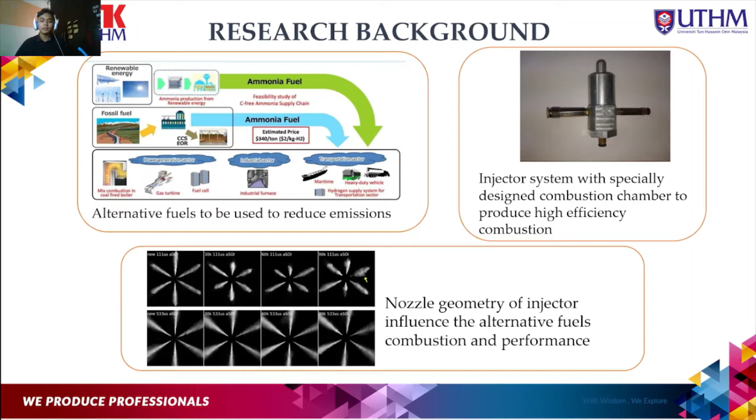And that's why nozzle geometry of injector influences the alternative fuel's combustion and performance. So the spray produced from the nozzles will affect the combustion performance as well. The problem statement. Inefficiencies in experimental method. With experimental method, it requires a lot of heavy machinery and expensive tools to do the experiment, and it consumes a lot of time.

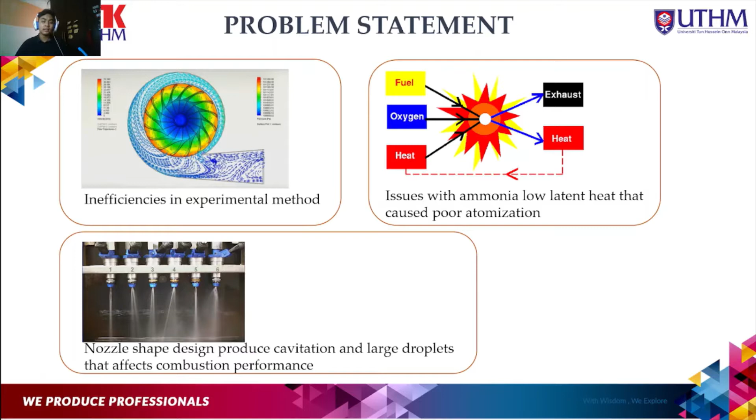The next one is issues with ammonia low latent heat that cause poor atomization. Ammonia itself has very poor properties. So we must overcome this issue so that we will have more stable combustion performance. The next one is nozzle shape design produces cavitation and large droplets that affect combustion performance. So the nozzle in this case will greatly affect the performance of the combustion.

Objective. There are three main objectives of this study. The first one is to study the simulation model for ammonia biodiesel in premix injector. The second one is to simulate the spray characteristics of the premix injector nozzle. And thirdly is to analyze the effects of nozzle shape on spray characteristics of the premix injector.

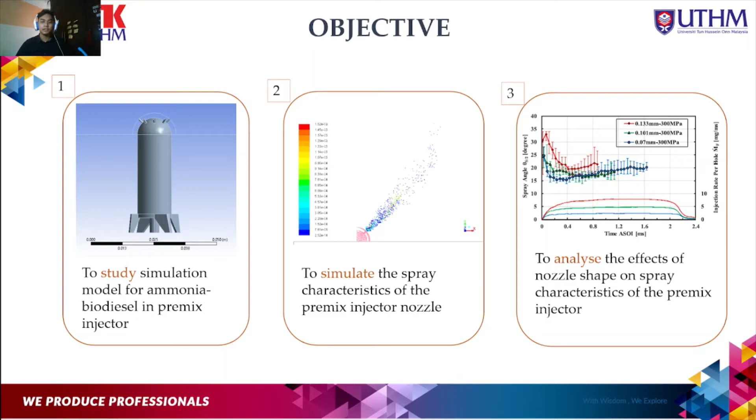Scope. Four main scopes for this study. The first one is nozzle shape, where we'll vary the nozzle shape. Second one is working liquid. The first one is the diesel and air fuel mixture, and the second one we will test with liquid ammonia. Third one is 45-degree injector angle with equivalence ratio at 1. So this one is fixed. And fourth, we will do the simulation using ANSYS Fluent and ANSYS Workbench, where we'll observe the mass flow rate, flow velocity, spray pattern, spray droplets, and cavitation produced by the nozzles.

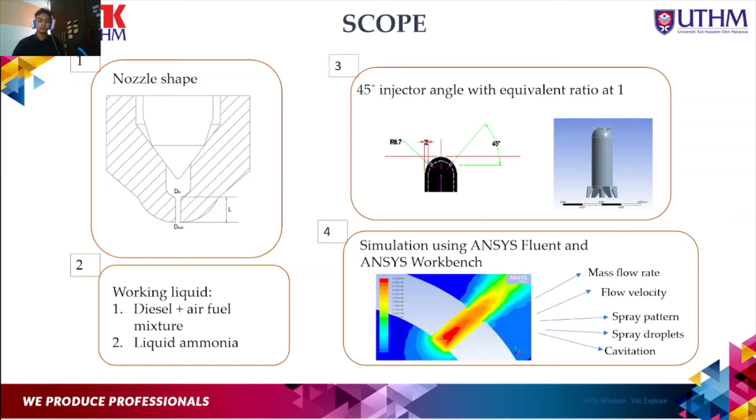Literature review. The first paper, Effects of Gaseous Ammonia Direct Injection on Performance Characteristics of Spark Ignition Engine. Basically the findings are about spark ignition engine using ammonia fuel, where increasing the level of ammonia injected into the combustion chamber results in both increased ammonia and increased NOx emission in the exhaust. The advantage is introducing ammonia into diesel fuel blend can act as alternative fuel without compromising engine power. And the disadvantage is, as ammonia has low latent heat, it is very unstable for the initial combustion.

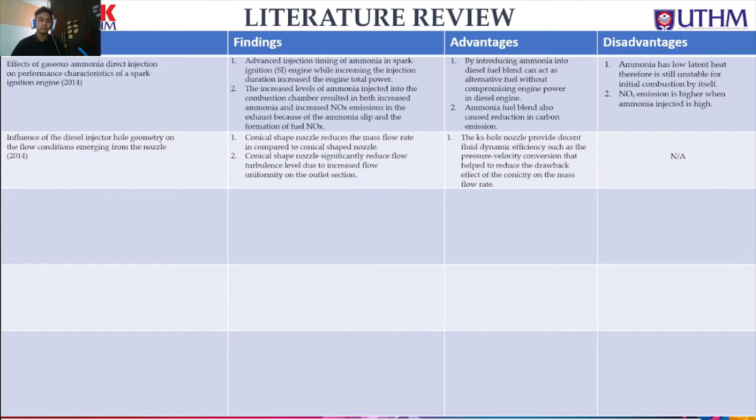The next paper is the influence of the diesel injector hole geometry on the flow conditions emerging from the nozzle. The findings are basically the conical shaped nozzle reduces the mass flow rate compared to cylindrical shaped nozzles. So it compares the shapes of nozzles. And the advantage is the KS hole nozzle provides decent fluid dynamic efficiency, such as the pressure velocity conversion, that helps to reduce the drawback effect of the conicity. So a KS hole nozzle is basically where the inlet hole is slightly bigger.

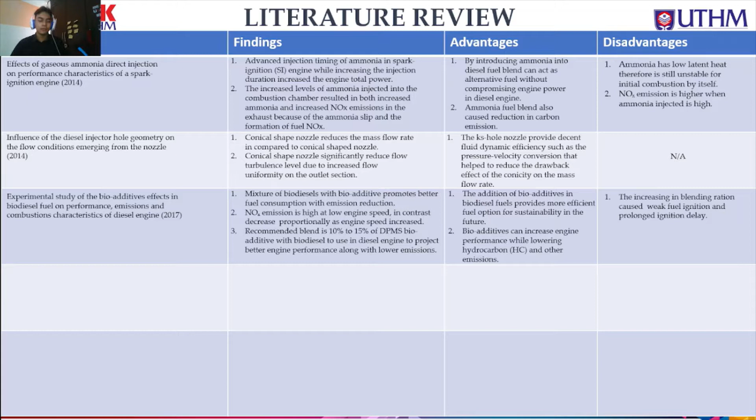Third paper is the experimental study of the bioadditive fuel effects in biodiesel fuel on performance, emission, and combustion characteristics of diesel engine. The findings are that a mixture of biodiesel with bioadditive promotes better fuel consumption, where it reduces NOx emission at high engine speed but is high at low engine speed. The advantage is the addition of bioadditive really helps to provide more efficient and more sustainable fuel. And the disadvantage is the increasing blend ratio causes weak fuel ignition and prolonged ignition delay.

The fourth paper is experimental study on the effect of the injector nozzle K factor on the spray characteristics in a constant volume chamber: near nozzle spray initiation, the macroscopic, and the droplet statistics. The findings are different K factor nozzles have different impact on spray tip penetration. The greater the K factor, the higher the spray tip penetration. The advantage is the increase of nozzle K factor increases the number of small droplets, which can lead to better combustion performance. Disadvantage is a lack of study evidence, where it states that nozzle K factor weakly affects the atomization characteristics. It doesn't state why. It doesn't have strong evidence of it.

And the last one is effects of nozzle shape on the flow characteristics of premix injector using computational fluid dynamics (CFD). The findings are formation of cavitation is significantly reduced when conicity of nozzle increases from K factor 0 to K factor 2. The advantage is there's a clear advantage of high K factor nozzles, which helps in flow characteristics.

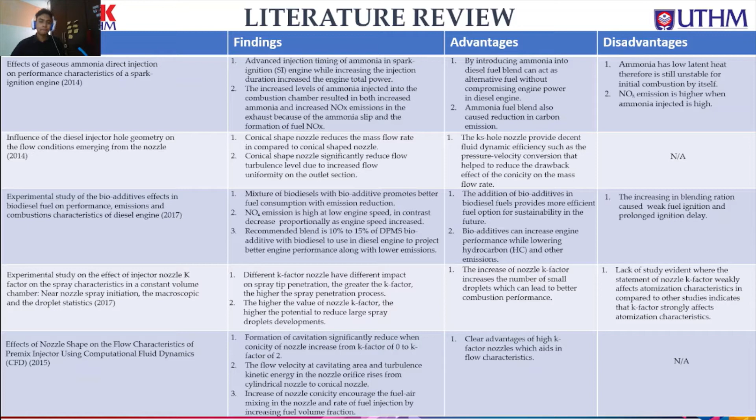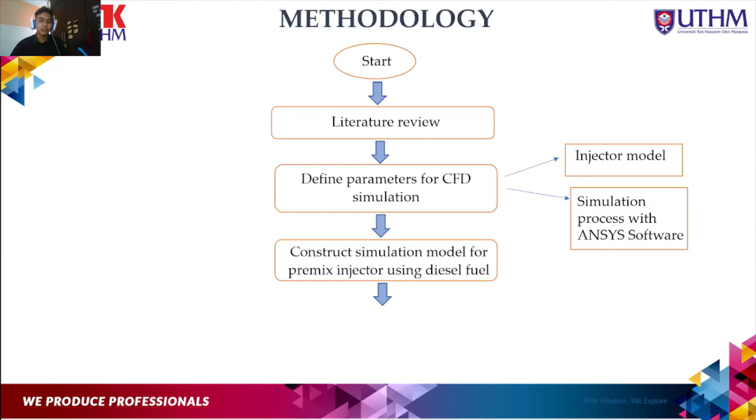Next is methodology. From the start, we will begin with literature review, and we will define the parameters for CFD simulation, where we identify the injector model and define the parameters in ANSYS software. Next, we will construct the simulation model for premix injector using diesel fuel, where the model is from the injector model, and we will set the boundary condition of the simulation. From the boundary condition, we will do a validation using diesel fuel on premix injector to set as baseline to compare with other fuels and the varied nozzles.

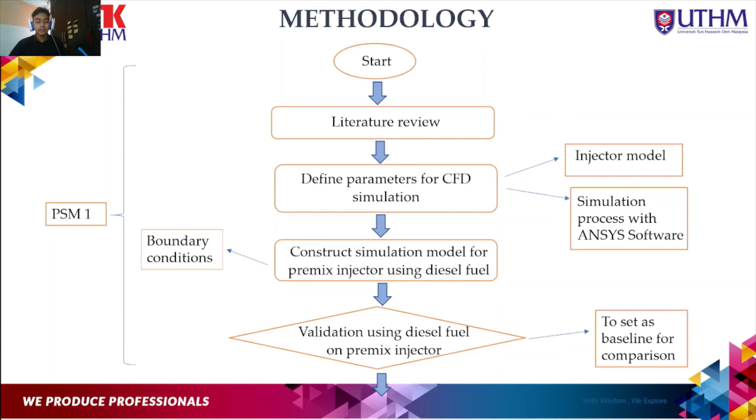So all these are done in PSM1. So for note, the validation is only 50% done, as I have only done the flow characteristic and not yet observed the spray pattern and the meshing of the grid independence test.

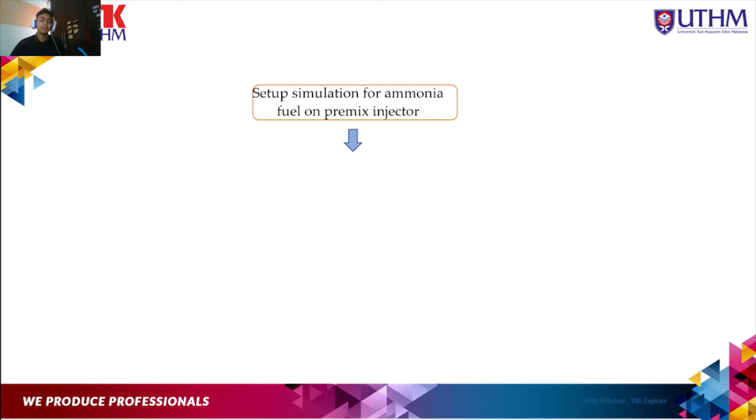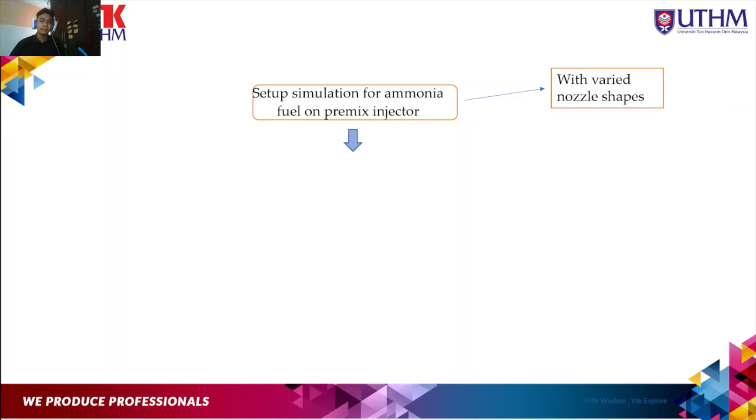So next is to set up the simulation for ammonia fuel on the premix injector after the validation is done. And we will proceed with varied nozzle shapes, which we will explain later. And next, after the setup is complete, we will simulate it using ammonia fuel. And next is to analyze the data, where we will analyze whether the nozzle shape will affect the spray characteristic and the performance of the fuel until the end. And this is in PSM2.

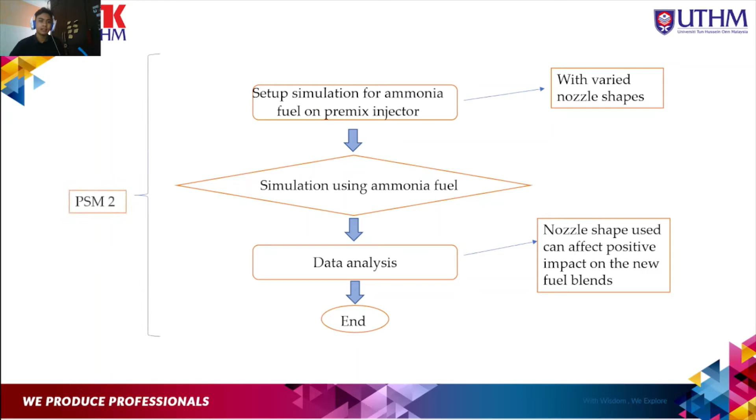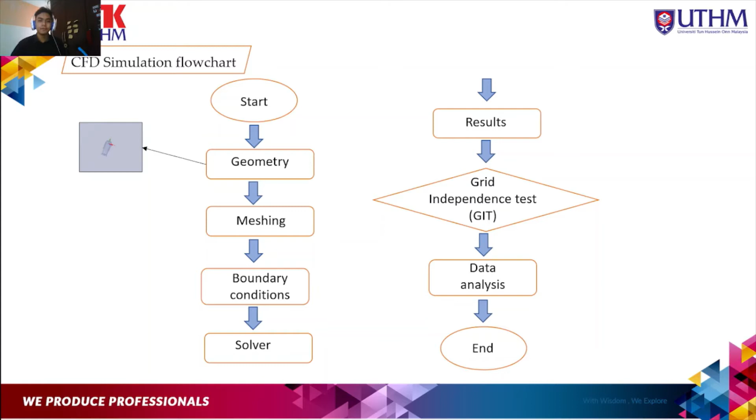So this is the CFD simulation flowchart. So from the start, when we identify the geometry, we will insert it in the ANSYS software. And after that, we will perform meshing on the geometry. And then we will identify and set the boundary conditions into the geometry. And then we will select the suitable solver for the simulation, which in this case is the SST turbulence model.

And next is the results, where we can project them in image form and see the patterns of the flow and the spray patterns. And next is the grid independence test. We will compare the meshing size in order to find more accurate results. And next is data analysis, where we'll transform it into graph forms.

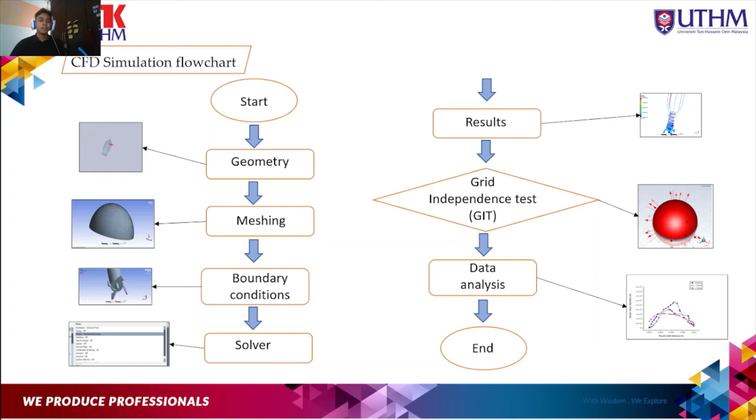So, simulation model. As mentioned earlier, diesel and air fuel mixture will be tested first as a baseline by using the 0 K factor nozzle. So when we set the baseline, we will compare it with the ammonia liquid fuel and with other nozzle shapes, which in this case are the 1.3 and 2 K factor nozzles. So we will compare whether the nozzle shape will affect the performance of the alternative fuel and whether it is good or not to replace it with the nozzle shape.

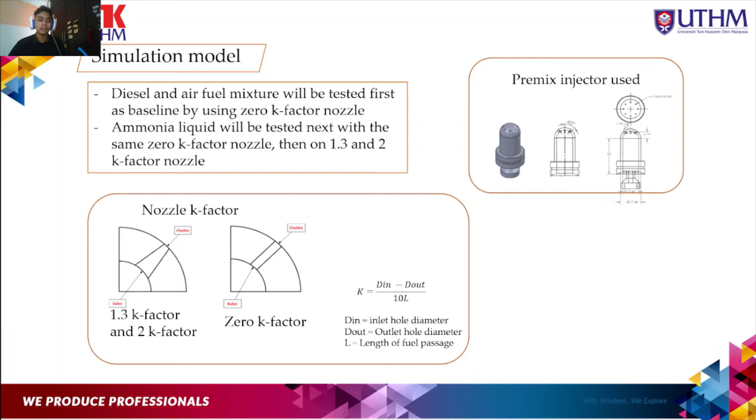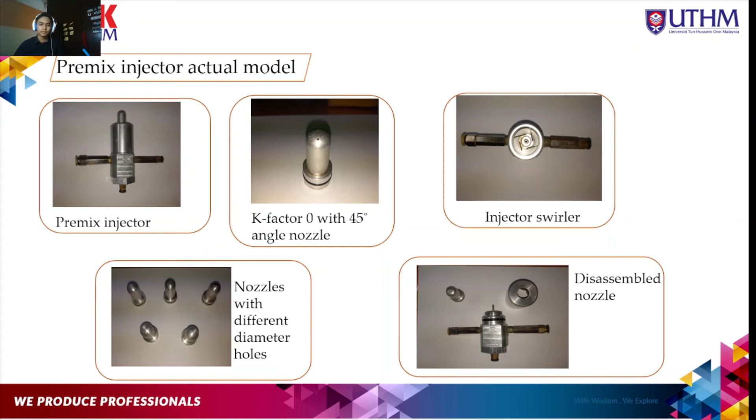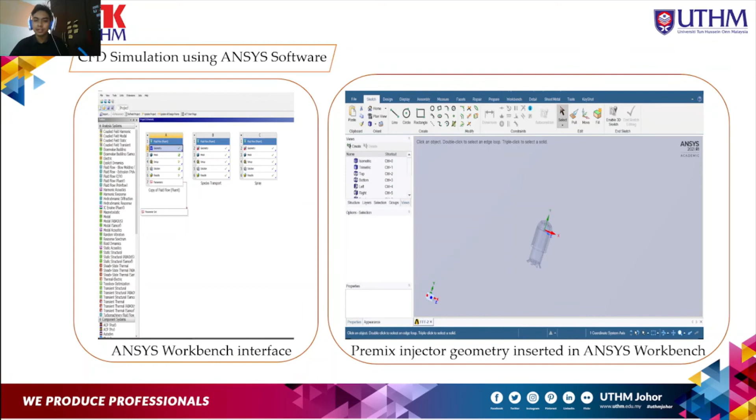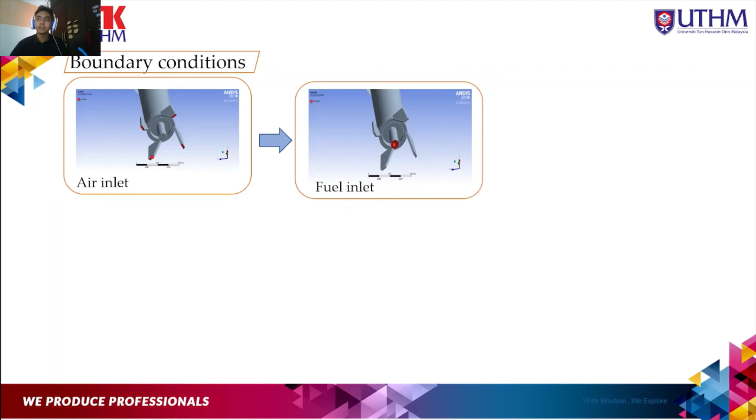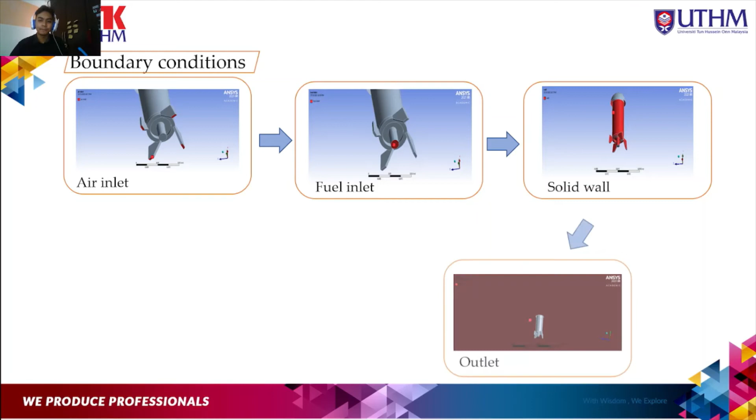So the boundary conditions: the first step is to identify where the air inlet is coming from. And the next one is where the fuel inlet is. And the next one is the solid wall, which is the wall that is stationary for the premix injector. And the next is the outlet, where the spray will spray on. And next is the periodic wall, where it is set to be a dome shape, limited so that the result has less error and is more accurate.

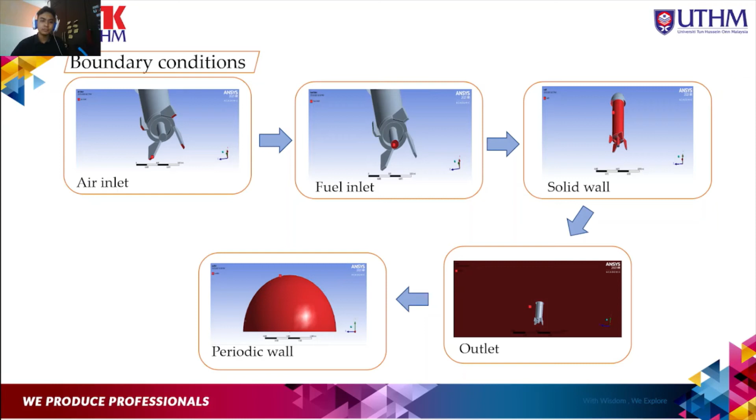So the solver and after processing. As mentioned earlier, the solver chosen for this simulation is the SST turbulence model, which is very suitable to observe this kind of spray and flow pattern and characteristics. And the after processing is the grid independence test, where we will split the meshing into mesh sizes and compare coarse, medium, or fine mesh sizes, and whichever one is more accurate, we will choose that mesh size.

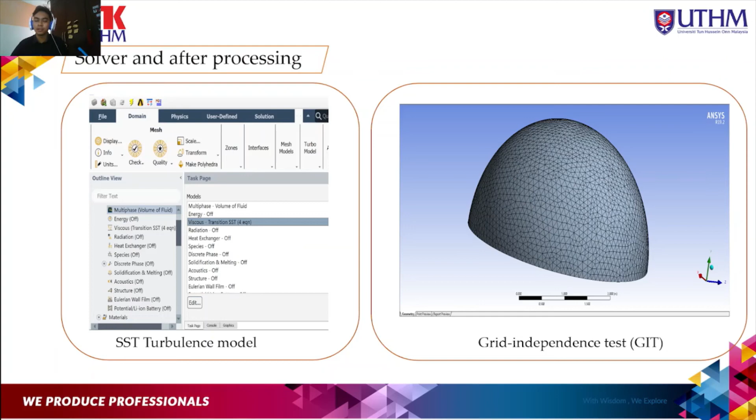So in conclusion, the expected result is whether the nozzles can greatly influence the ammonia fuel, and whether nozzle K factor 2, 1.3, or 0 will improve the combustion performance or the atomization performance of the ammonia fuel, and whether the nozzle shape can overcome the weakness of ammonia properties. And next is whether we can replace the already existing diesel fuel and other biodiesels with ammonia fuel.